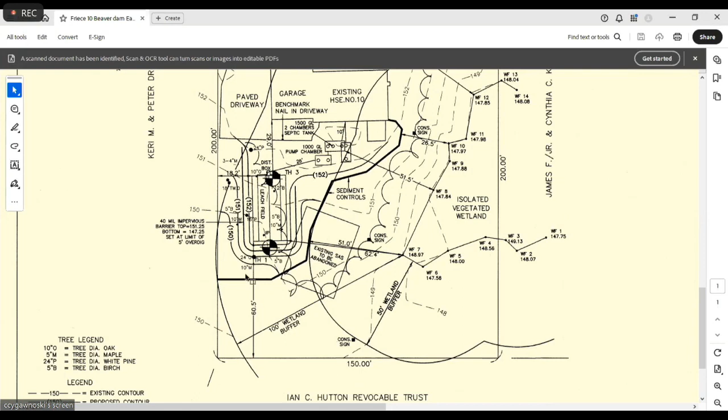In this area here, we located all the trees that would have to be removed. There are several, including some 10-inch, 24-inch trees and many smaller ones, but there is no other place on the lot that we can put the septic system.

I know they've already started some work around the house, so we had them put siltation control in. I assume they put it where the limit of the lawn was. I have not been back since they did that.

So we are calling for conservation markers. I wasn't exactly sure we would want them in this case, considering the 50-foot buffer does go through the house. I was placing them along the edge of the existing tree line, but I'm sure Mr. Freese will place them wherever you would choose.

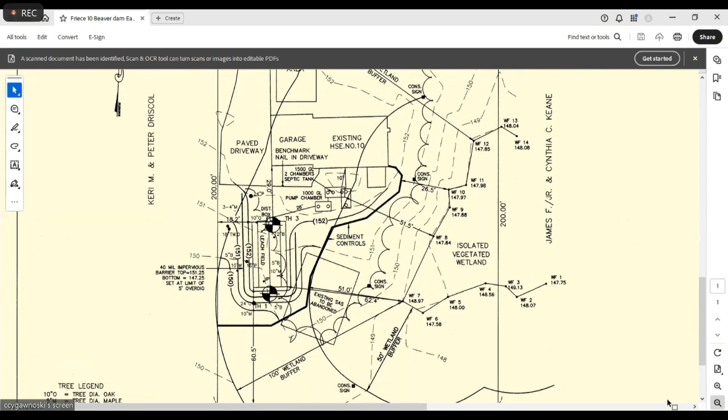If you have any questions. Well, I don't think he'd like them in his living room, but no.

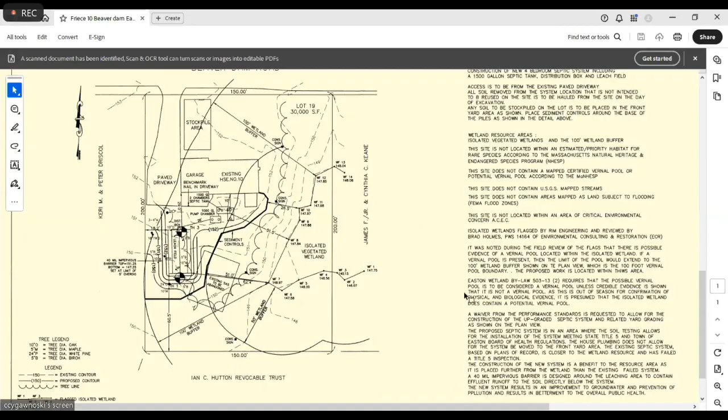Point's taken. So the potential vernal pool, where is it? Because you have the isolated wetland labeled. Where approximately is the PVP? Well, ECR didn't flag it, so I would assume it would be the edge of what we're showing now. Okay.

We did check to see if this was ILSF, but it's 4,500 square feet and only contains 2,300 cubic feet, so it doesn't qualify as that. Okay, there is no outlet to this. We've worked on this lot, house number 6, probably 10 years ago, and had located this side, so we did have an idea of how large this thing is.

Is there a liner proposed for the septic system? Yep, the impervious barrier will be at 5 feet from the septic system. Thank you, and you did answer that question in your presentation. I apologize. That's fine. It's a 40 mil impervious barrier.

Jennifer, any additional staff comment here? No additional comments. Thanks, so it sounds like you're still working with the Board of Health on this. This is a question we still have to deliberate as a board, but do you want a permit tonight, or is this something that's subject to change? Well, the only thing that would change, if they didn't approve the granting of the 1 foot waiver over groundwater, is we'd have to raise the system.

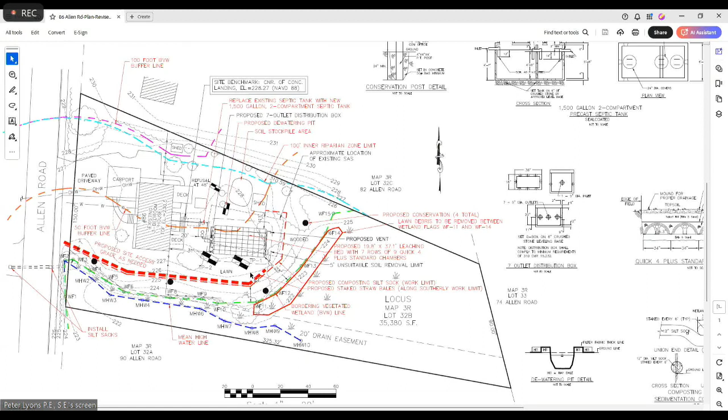Peter, could you just call out where the existing septic is? Yeah, it's kind of tough to see, but it is there. Here's the leader for it, and it's this dashed rectangle. So we're pretty much going to be removing the existing leaching field to install the new one. There's an existing tank right behind the shed, and then a pretty large, looks like, I don't know, 20 by 45 or so existing leaching field. That will be removed where encountered, and the rest just abandoned.

All right, Jennifer, any staff comment here? No, he's already mentioned the compost that needs to be removed from the wetland area. Any comments or questions from other members of the commission? Seeing none, any public comment here for 86 Allen Road?

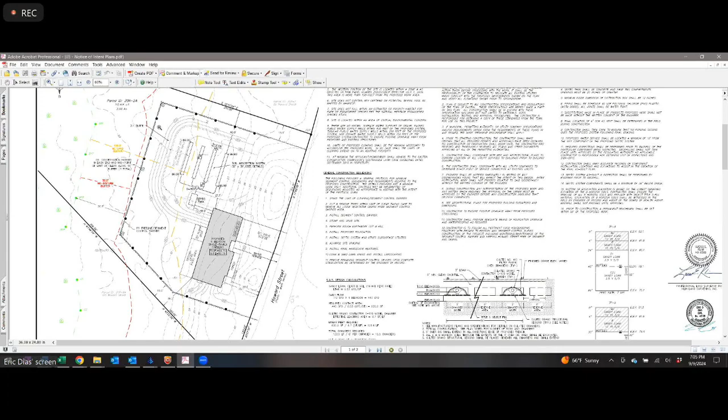Thank you, Jennifer, any staff comment on 91 Howard? No, the only other question I had was whether it's more than an acre for a NPDES permit. But he's already answered that question. So thank you.

Any comments or questions from members of the commission? That was pretty straightforward for me. Yeah. Any public comment here for 91 Howard Street? All right, again, seeing none.

Eric, I assume you'd like to close. Yes, please. Motion to close the public hearing for 91 Howard Street. Spady, second. Carol motion, Spady a second. Roll call vote: Benson, aye. Carol, aye. Spady, aye.

Phil, did you vote? Yeah, sorry, didn't hear that. Motion to issue an order of conditions and permit for work for 91 Howard Street. Vecchio, second. Carol motion, Vecchio second. Roll call vote: Benson, aye. Carol, aye. Spady, aye. Vecchio, aye. Thank you, Eric.

Challenging site, well-designed project. We appreciate it. Appreciate it. Thank you all for your time and your help. Thank you.

Moving on to continued hearings and possible deliberations. First up is Washington Street, Dickerman Road to Elm Street, which is the MassDOT project. I'm just going to make a note in your breakout agenda that I write on. They're last, but on the posted agenda, they're first. So if you're looking at the agenda I sent you, it's just in a different order.

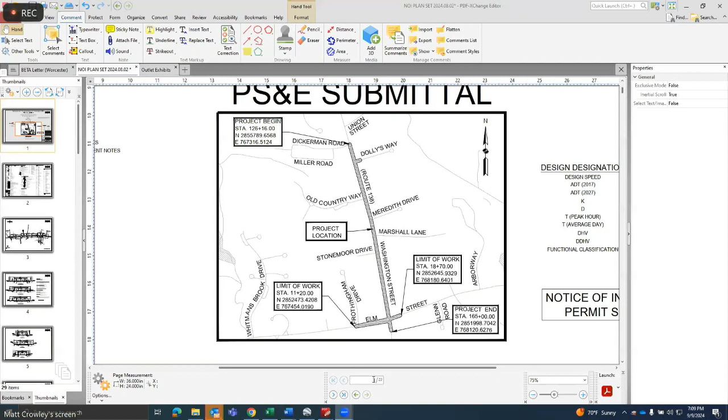To focus in on some of the wetlands throughout the project, there are approximately 4 wetland areas, primarily associated with outfall locations. That's where I'd like to focus a little bit to start.

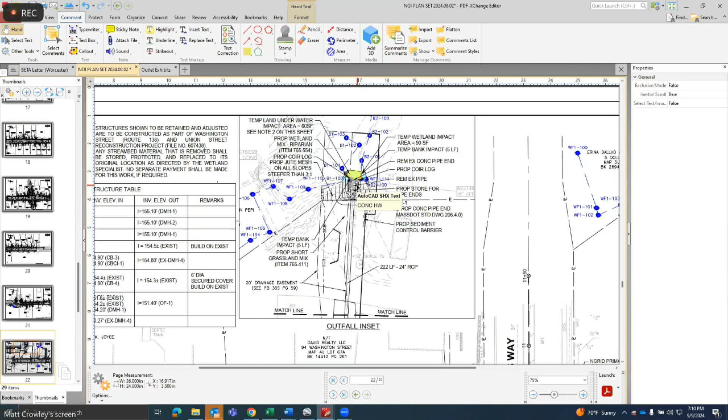The first area is near the northerly project limits at 94 Washington Street. There is an existing drainage outfall that continues beyond the property and discharges to a wetland system and stream. The existing outfall is located right at the edge of the wetland and has been observed to be underwater during certain parts of the year.

As part of the project, we propose to pull the outfall back about 15 feet and also raise the invert elevation of the outfall. We're going to be adding scour protection, and impacts to wetland resource areas are all temporary in nature, to both land underwater, wetlands, as well as bank.

All the temporarily disturbed areas are going to be fully restored with a combination of wetland seed mix, jute mesh, and coir logs, and all restoration efforts are going to be observed by a wetland specialist. It will be documented with associated wetland monitoring reports.

We should note that any stream bed material that is removed as part of the associated work here is going to be stored, protected, and stockpiled, and then returned to its original location.

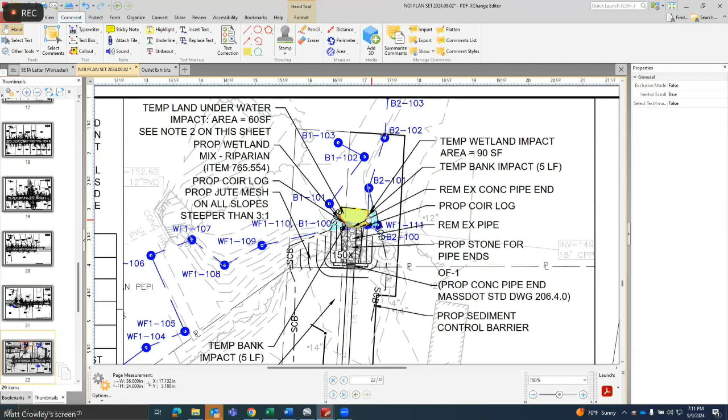So the next area I would like to discuss is just a little bit further to the south, at 113 Washington Street. The work here is very similar in nature to the work at the outfall we previously discussed. The primary difference is that this is in proximity to a fairly recently installed soil absorption system.

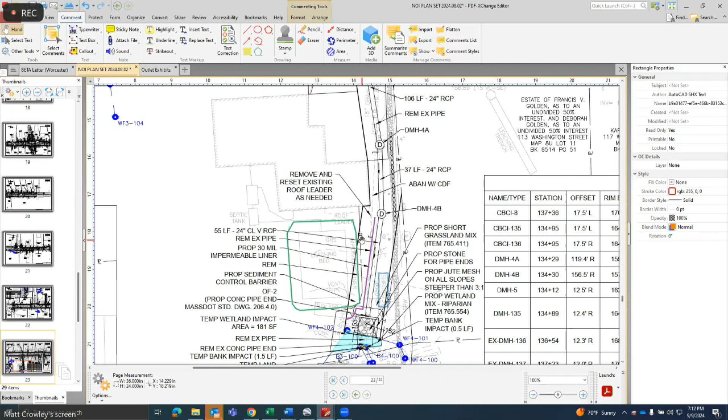We don't anticipate any impacts to the soil absorption system itself. However, to ensure that we're not creating any sort of conduit between the system and the outfall, we're providing a 30 mil impermeable barrier along the edge of the trench. There's also going to be some impacts to some of the plantings done as part of that work. I think there are 6 inkberry and 2 oak trees that we're going to be replacing in kind.

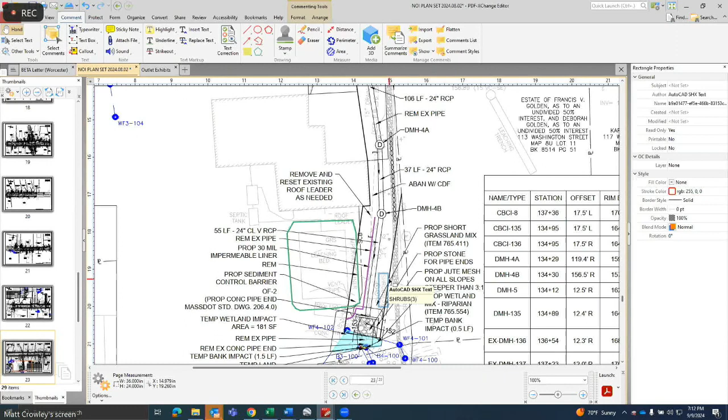Most of the roadway section is all in upland areas, so I'm just going to work from north to south. I want to get to, let me skip over to the last page. This is Washington Street here, and this is Elm Street coming down.

There's one additional outfall just beyond Frothingham Drive. This outfall carries flow from town roadways, and there's almost no change in contributing area or impervious area here. As such, any future upgrades in this area would be the responsibility of the town and the DPW, as this is a town drainage system which carries town drainage flows. We understand the town has recently cleaned out the drainage system in this area, and we are providing some additional catchment in the form of deep sump catch basins.

So we do anticipate improved conditions in this area as well.

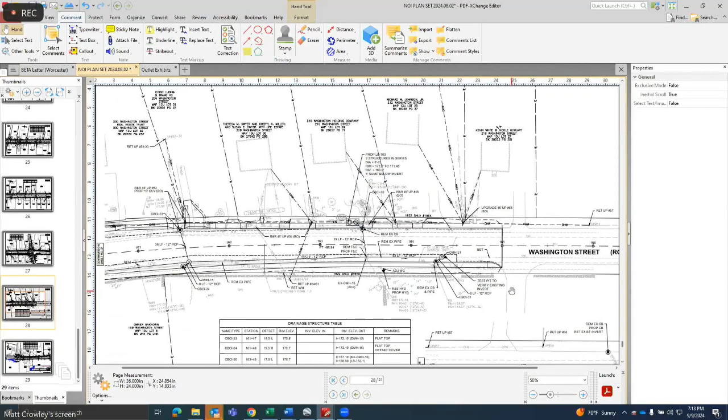The last area I wanted to discuss was what we've been referring to as the southerly outfall. This would be over here on the left, the intersection of Elm Street. The drainage system continues beyond the project limits, approximately 290 feet, and discharges off-site behind a private property behind this farmland here.

We understand the property owner has expressed concern with discharges of pollutants onto their property. Currently there is no formal stormwater treatment discharging here, and the project proposes to replace existing catch basins with deep sump catch basins with hoods.

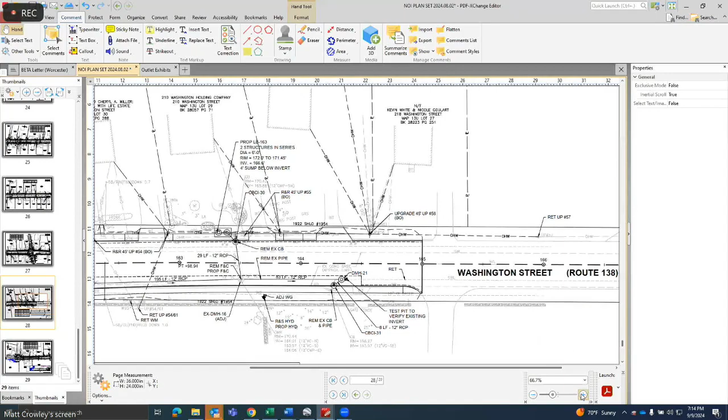These improvements are anticipated to provide improved sediment and debris capture and can provide some removal of hydrocarbons. We are also proposing a number of leaching areas along the project corridor, consisting of a deep sump catch basin that directs the initial flow to a series of leaching basins shown on this plan.

The overflow will continue into the main drainage system, but this will also provide some stormwater improvements to this outfall. As of our last submission to the commission, we were not proposing any improvements to the outfall itself.

However, as of this afternoon, MassDOT was able to confirm that there is in fact a drainage easement along this pipeline to the outfall, and they are prepared to commit to provide some upgrades in the form of maintenance and riprap scour protection if the commission would like to see that done. So we can provide some upgrade to that outfall.

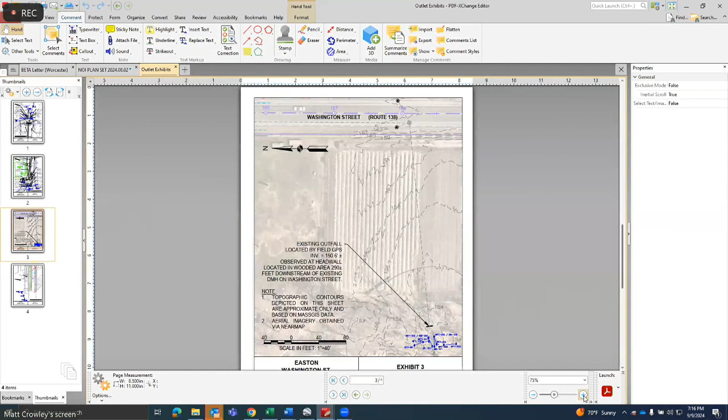I'm sorry, so is there a drainage easement here? It sounds like the answer is yes. The answer is yes — MassDOT was just able to locate it as of this afternoon, so nothing is depicted on the sheet we submitted to the commission. The drainage outfall was installed back in 1922, so it did take some effort for MassDOT to track that down. Yeah, but we were all very happy to see that there is in fact an easement there.

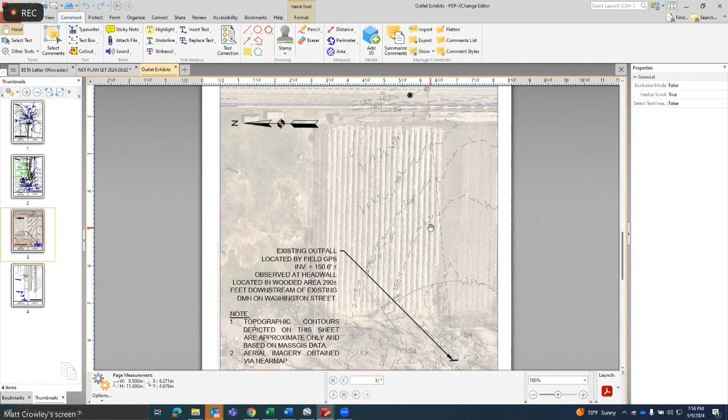Regarding and answering all the rest of the questions we had for you for that area — I'm sorry, Jen, I didn't quite hear what you said. Having the easement will help you answer all the questions we had for that area, so that's good to know.

So regarding stormwater throughout the remainder of the project, as I noted about the deep sump catch basins with hoods, that is what is proposed through the entire project corridor, not just at the southerly outfall. We are also proposing these leaching type structures in 6 different areas throughout the corridor — it's not just limited to a single section.

During the peer review process, the peer review did express some concern with the separation to groundwater from the leaching structures. These are about a little over 9 feet below the existing ground. So we did go back and take a relook at that.

Although not depicted on this plan, we are going to change these over to a linear chamber system, which will bring these up about 3 feet higher than they were shown on the last submission. So we will have improved separation of groundwater, and it should ensure better pollutant treatment without being impacted during the spring.

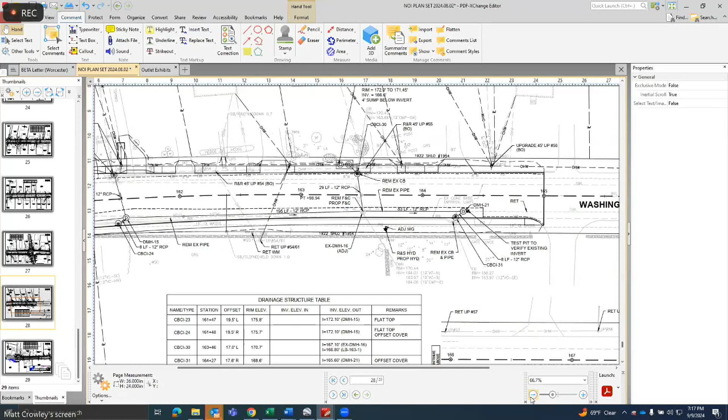Just to reiterate, this project is considered a redevelopment project, and stormwater improvements are only required to the maximum extent practicable. However, it is certainly worth noting, after going back and looking where we could add these leaching structures, we are able to provide the required water quality as well as the recharge for all the new impervious area on the project on a project-wide basis.

Also worth noting, the project proposes an increase of about 27,000 square feet of impervious surface, roughly half an acre. To put this in context, you're probably looking on the order of 4 to 5 residential lots being developed — that's essentially the amount of impervious being added to this project corridor, which is about 3/4 of a mile long.

So with that, I'm sure the commission may have questions or may wish to hear from their peer reviewer on the subject. I'd be happy to answer questions or go from there.

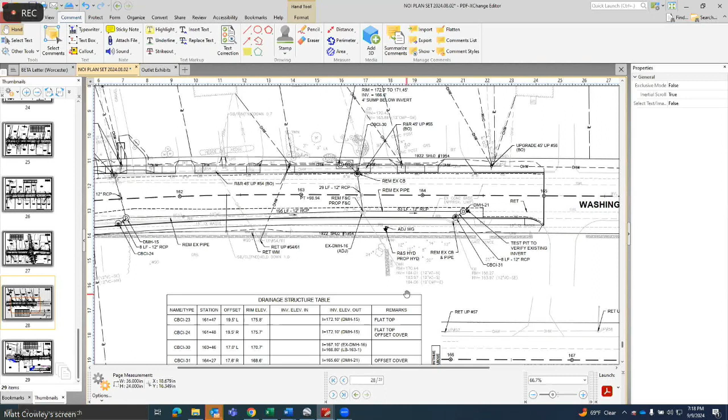No, that was extremely helpful. I think a lot of the understanding that there's an easement there and the state is willing to provide some additional details on how water will be treated will help guide us here.

John, would you mind giving us some input? Sure. And it sounds like some of the questions that were listed in my letter are in the works of being answered.

We weren't sure about the easement, or what, there was nothing going to be done to that outlet, which is currently underwater based on their investigations. So the southern outlet, I think, was the biggest issue I had.

One of the comments I had, I don't know, Jen, if you can put up those hydraulic profile things we had talked about. I don't know if that's possible. I just wanted to note this was one issue that I had in a few different spots.

So like Matt said, the pipe was put in 1922. And it might, I think it said on the plan, it might even be clay. Is that right? I'm not sure on that one. I'd have to go back and look. Yeah, it's amazing that it's functioning at all, to be honest.

I don't know if anybody's put a camera down it. I'm sure water goes through it, but it's the clay joints, usually, well, it's a farm field. If it was a forest, it'd probably be full of roots. But obviously, since 1922, it might have built up a little bit in that area, so it's likely an undersized pipe.